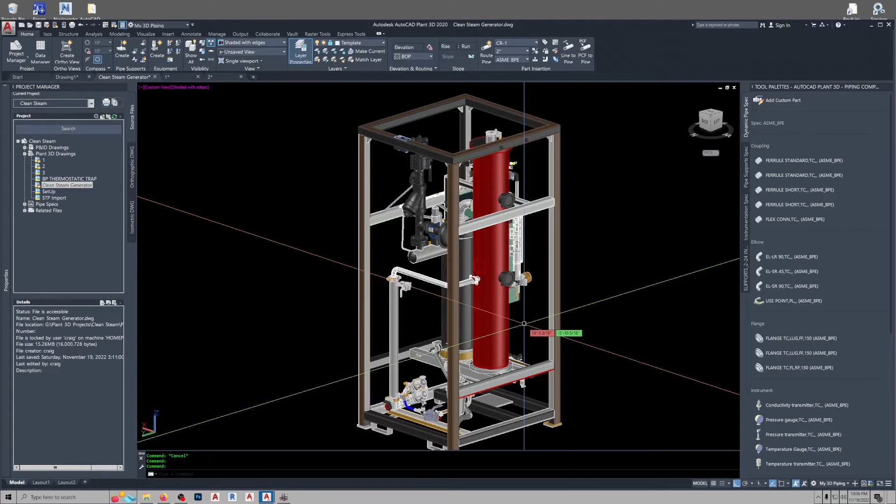This was a STP file downloaded from a manufacturer's website and then imported. Now, it's a pretty picture, but the amount of detail is really unnecessary to show how to connect it up. It just takes up too much of the computer's resources. When we start getting down to stuff like this, it's not necessary.

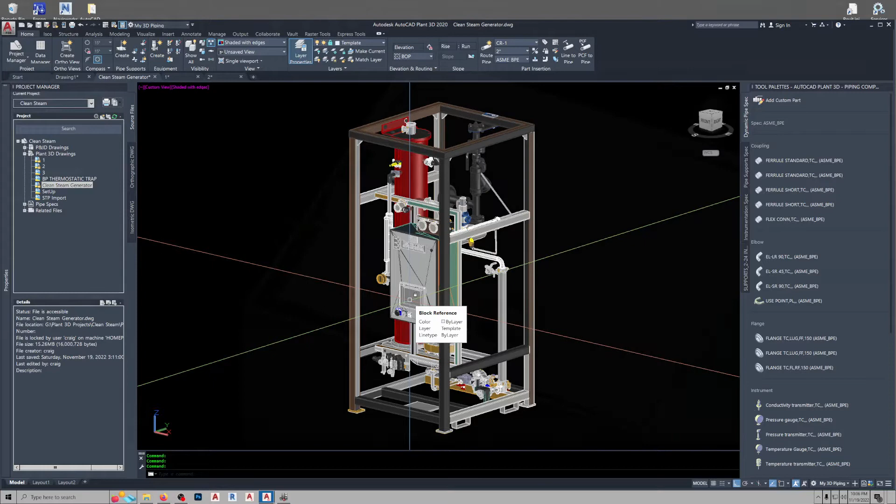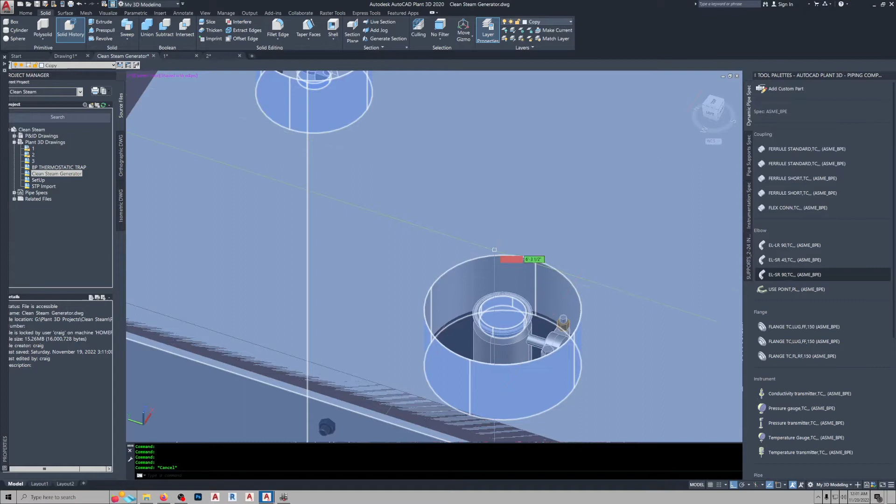So I spent a couple of hours converting it into something that had the connections in the right places and took up the volume, and I'll show you that here. What I did here is I created an extrusion lined up at the center line of this POC and made a cutout. I used a subtract. Pick this object first, then you pick your extrusion and hit enter, and it cuts a hole.

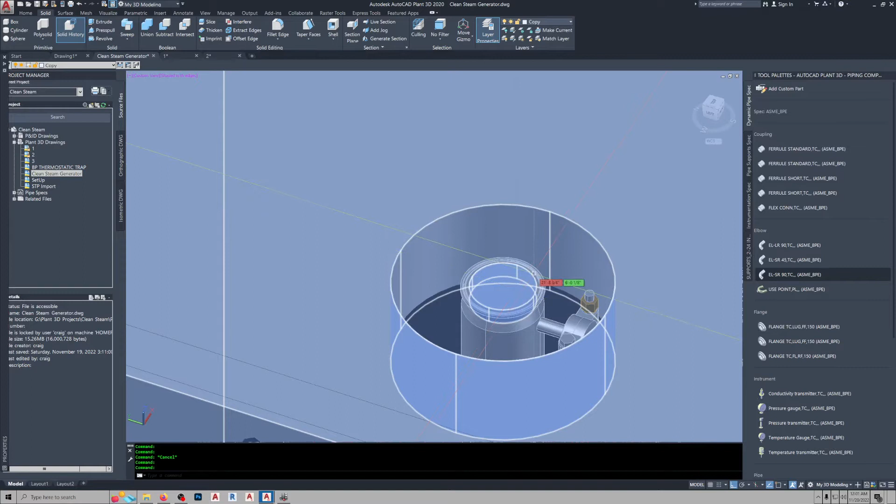Now, it helps lining things up if you draw a construction line from the center point of this POC and draw it out here. And then that way, when you go to place your circle, you choose the end point of that line, and you know you're going to be dead nuts on in the center of this connection. Just saves a little time instead of hunting and picking when you're trying to draw both of these.

Now, let's hide this. And you can see my connection here.

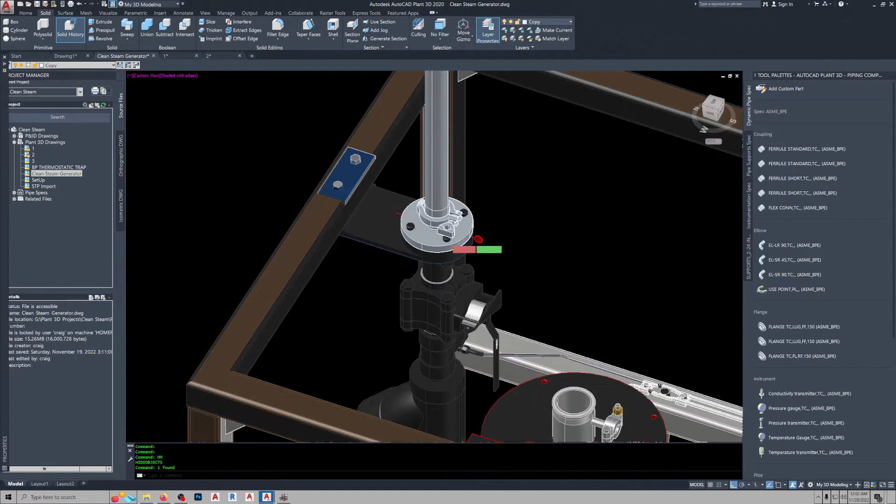Man, I have 32 gigs of RAM and an 8 gig video card, and it's dogging my machine.

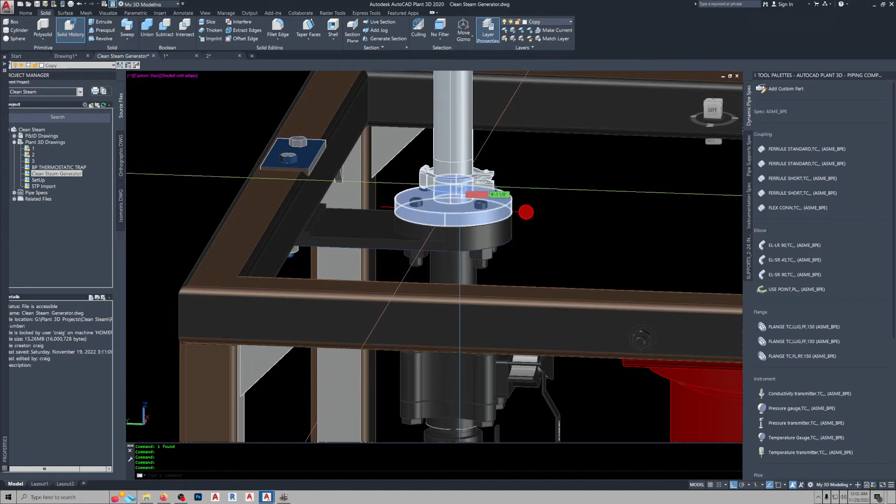Anyway, the connection, that flange connection, came right on. And I guessed pretty good at the size of that pipe. I guessed it was a 2-inch. I think that's what I got going out of there. Come on, give it to me. Yeah, 2-inch. Anyway, that's basically the whole thing repeated for every POC.

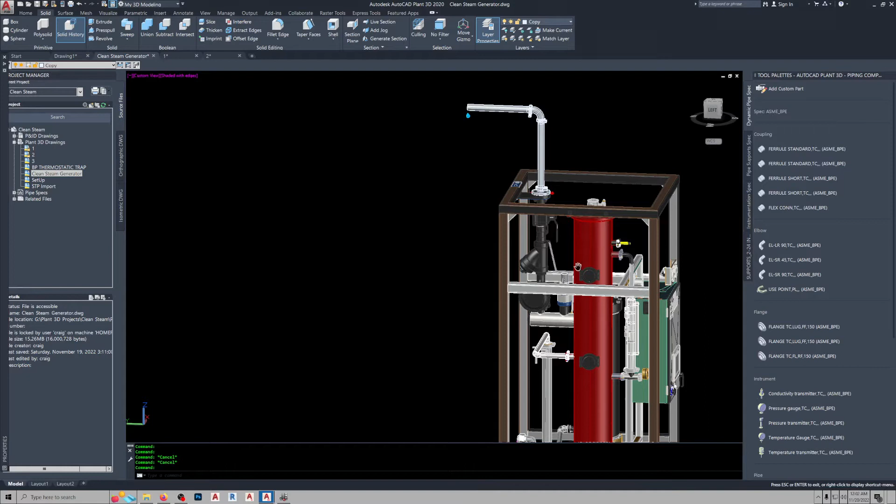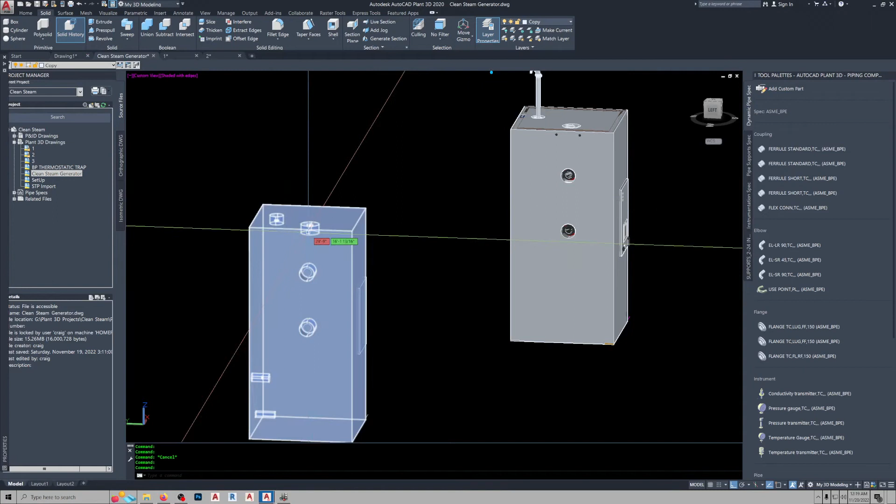I want to show you a few things that'll help you speed up your work and save you from having to do things over. Before you turn this piece into equipment, while it's still a 3D solid, make a copy of it, put it on a separate layer so you can turn it off. And while you're doing your editing in this 3D solid, you're going to want to make sure solid history is turned on. That way you can go back here and click on it; there's another tutorial out there that'll tell you how to do it. If you hold down the control key, you can pick that and edit it.

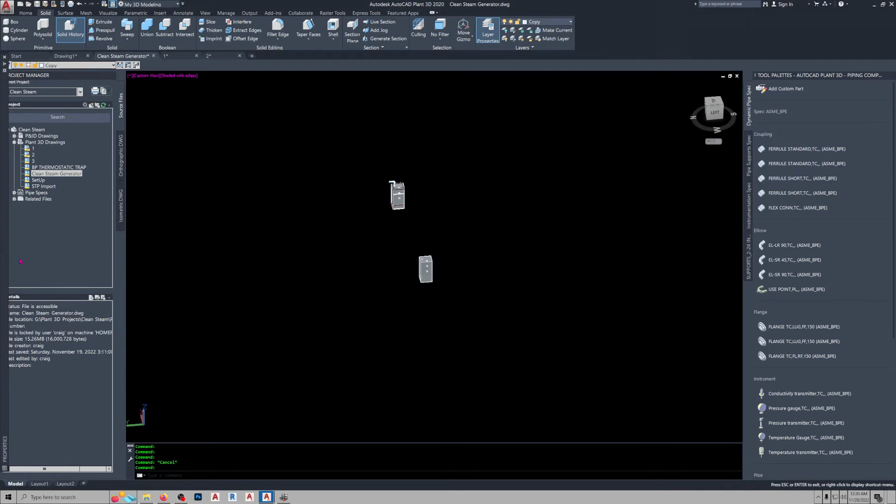The other thing that'll save you a lot of time, man, of course I got a video recorder running too, and it's taking up some of my resources. All right, so let's get back to this thing. What was I going to say?

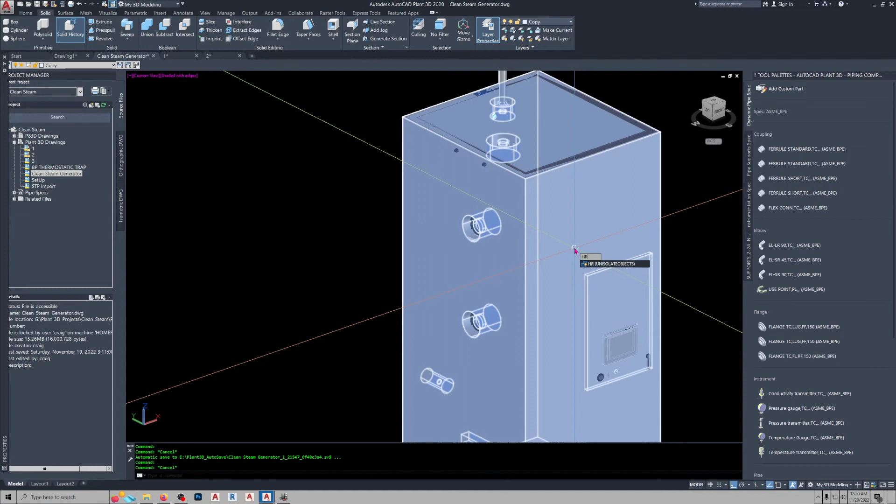Oh yeah, to save you from turning on and off layers, there's a few commands that I picked up using Revit, and one of them is to hide an element, and for me it's HH. Now, that is not going to be in your PGP file. You have to add that to your PGP file, and you can make it any command you want. The other one is HR, which undoes either the hide or the isolate. And again, you have to add that.

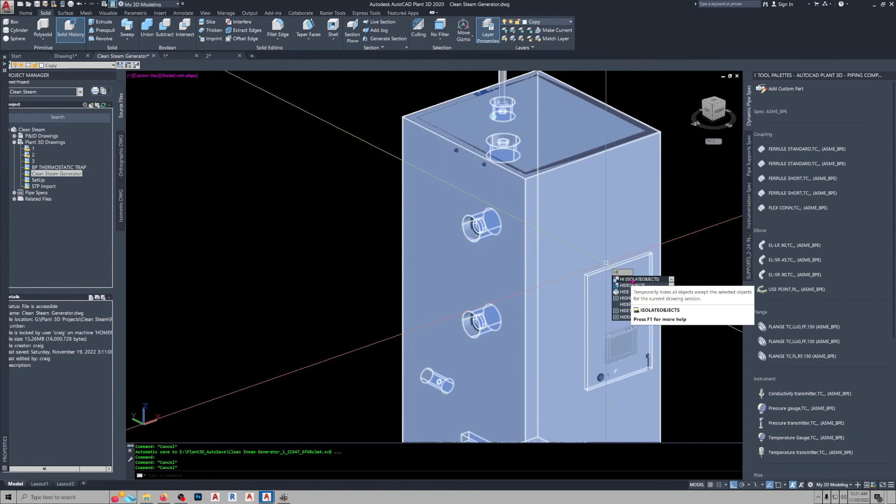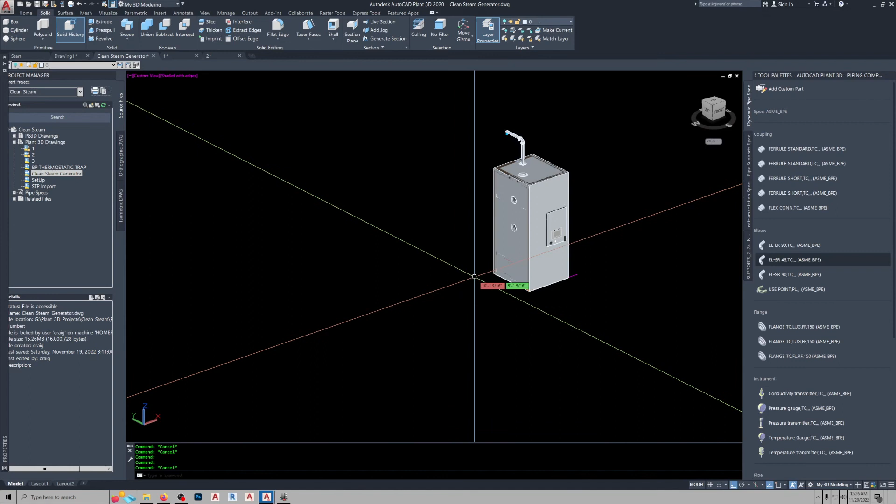And then the other one is to isolate something. And in each instance, all you do is hit whatever you decided for unhide object. For me, it was HR. Just saves you a lot of hassles, because sometimes things get in the way and maybe you just want to hide one part or isolate one part without doing the whole layer. Okay, I think that about covers it. And if you go back to use your copy, like I did here, don't forget to turn it back to layer 0.